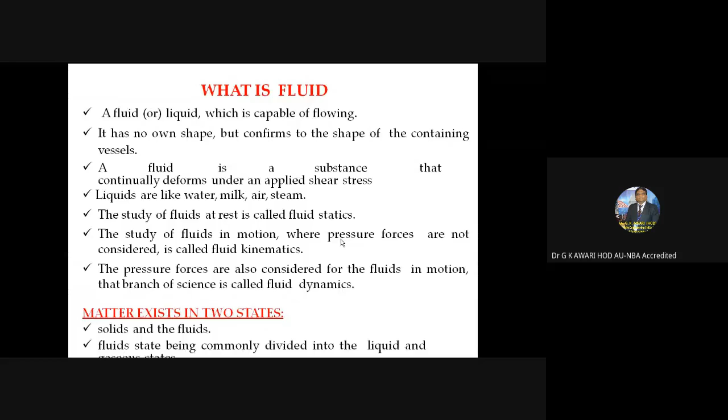What is fluid - you have studied this. Differentiate between solids and fluids - this you have also studied. The units and dimensions, that is fundamental units, derived units - these parts also you have studied. System of units, that is SI unit, FPS unit.

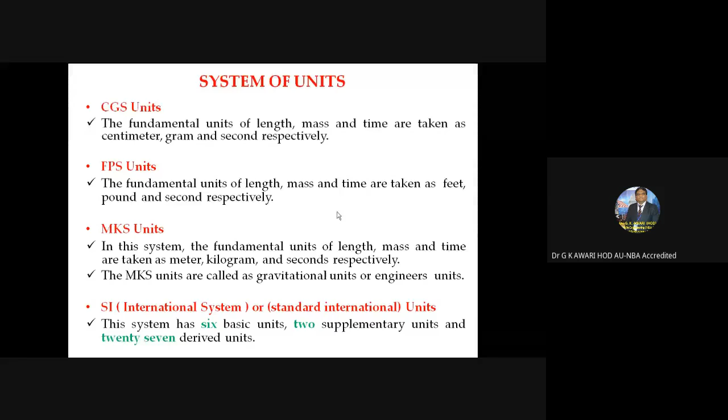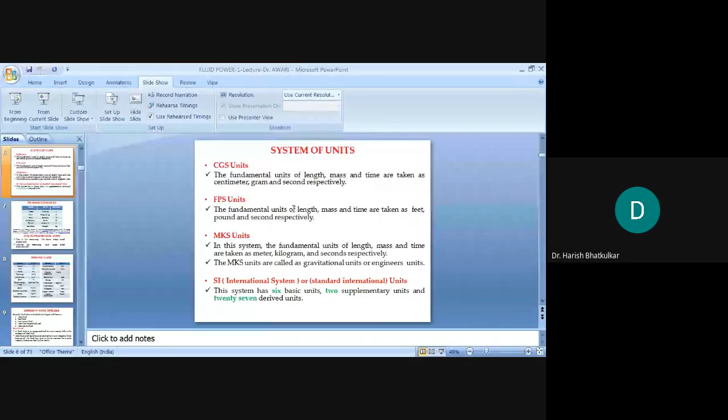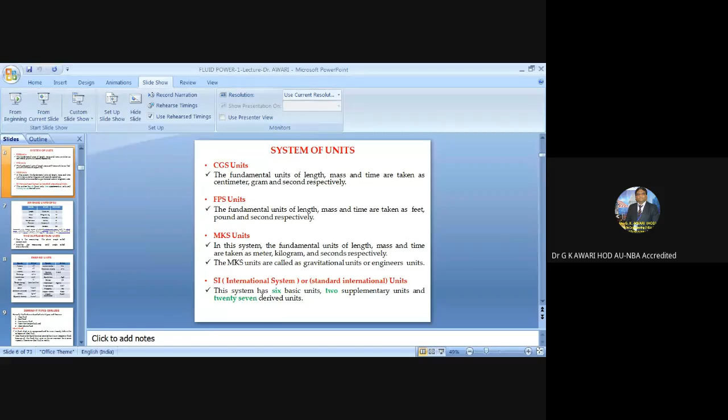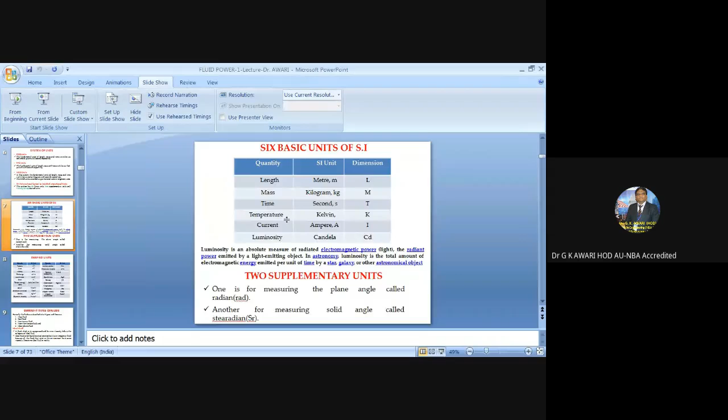Then the different types of fluids - this part is also covered by some other teacher from your organization, that is ideal fluid, real fluid, Newtonian fluid, non-Newtonian fluid, and ideal plastic fluid. So I will not go into the details of that.

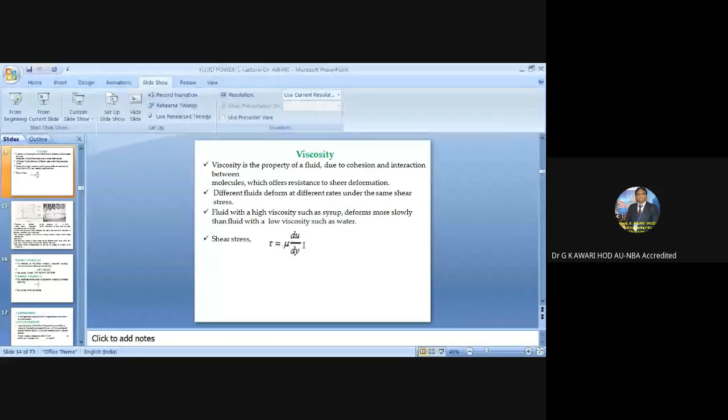Then the properties of fluid also - mass density is being covered, specific weight also it is being covered, volume is being covered, then specific gravity also it is being covered. Viscosity, which is a very important parameter, I hope is also being covered, and the shear stress, that is tau equals mu into du by dy. The explanation of viscosity and the two parts of viscosity, that is dynamic viscosity and kinematic viscosity, it is also being covered.

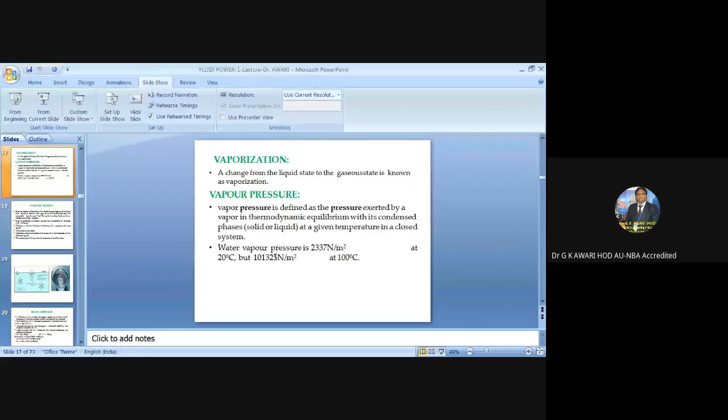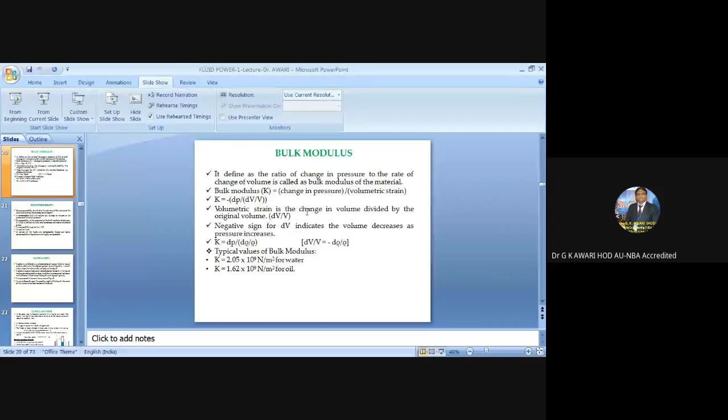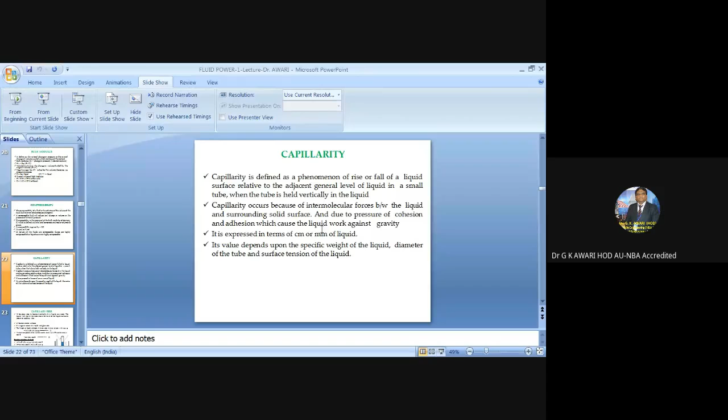Then vaporization - the importance of vapor pressure while designing hydraulic machinery, this part also I hope is being covered. And surface tension, this part is also covered in the basic part of fluid power. Then bulk modulus, reciprocal of compressibility basically. Then compressibility - you know that air is compressible and water is not compressible, so compressibility factor also is being covered. Capillarity, I hope that it is being covered, and capillary rise and capillary depression also you have studied.

So my topic, from where I am starting today, is basically buoyancy and flotation.

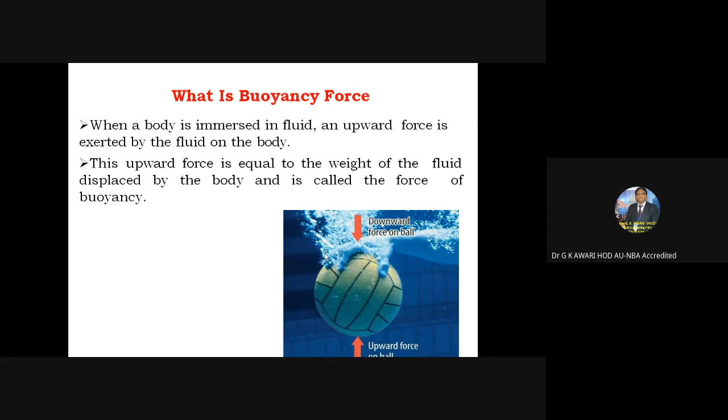If the downward force is more and the upward force is less, the body will sink. This upward force acting on the body is nothing but the buoyant force. When a body is immersed in a fluid, an upward force is exerted by the fluid on the body. This upward force is equal to the weight of the fluid displaced by the body and is called the force of buoyancy.

So basically, the buoyant force is the upward force on an object exerted by the surrounding fluid. So when an object pushes the water...

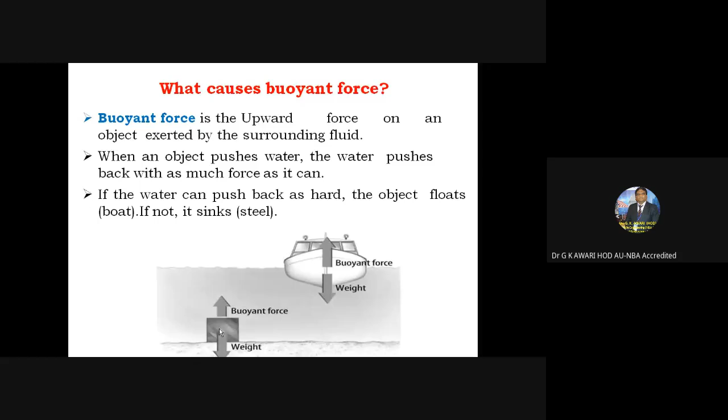So when an object pushes water, the water pushes back with as much force as it can. If the water can push back as hard, the object floats. If not, it sinks. The example given is a boat, and this is the component of steel. Naturally, it will sink. This causes the buoyant force.

Now let us see the forces acting on buoyancy. The buoyant force is caused by the difference between the pressure at the top of the object, which is the gravitational force pushing it downward, and the pressure at the bottom, which is the buoyant force pushing it upward. Since the pressure at the bottom is always greater than at the top, every object submerged in a fluid feels an upward buoyant force.

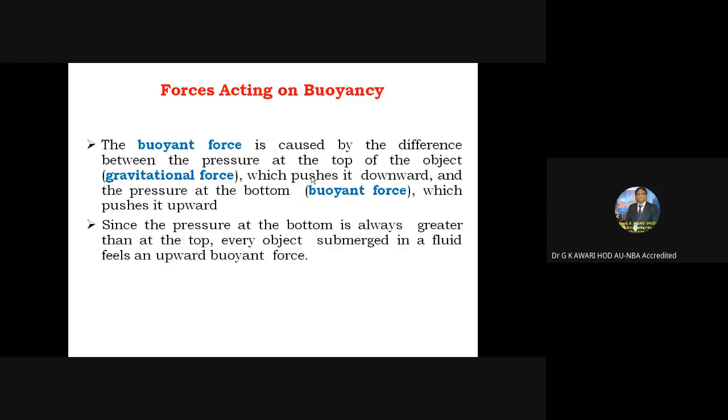So the buoyant force acts in the upward direction, and the weight acts in the downward direction. These are the forces: due to gravitational force which pushes it downward, and the buoyant force which pushes it upward. These are the forces acting on any body kept in water or the sea. Now we will see how to calculate the buoyant force.

So buoyant force is basically the weight of the displaced fluid. BF is equal to W air minus W water. What does W air mean? Buoyant force is nothing but the weight of the object in air minus the weight of the object in water.

For example, a person weighs 250 Newton while swimming in the Dead Sea. When outside of the water, they weigh 600 Newton. What is the buoyant force acting on them? Will they sink or float? Buoyant force is equal to W air minus W water, so it is 600 minus 250, which equals 350 Newton. So the person will float because their weight in the water is less than the buoyant force.

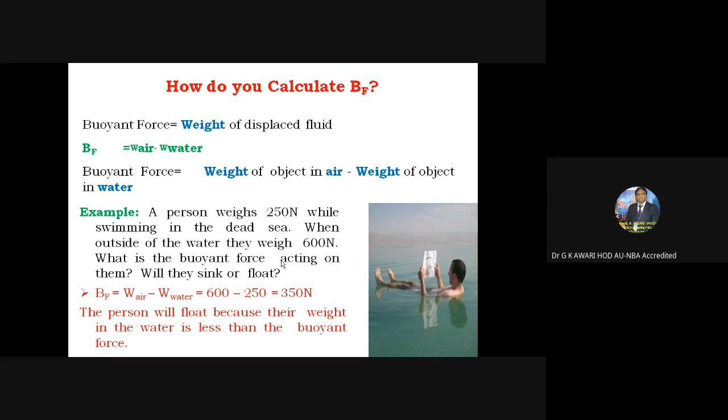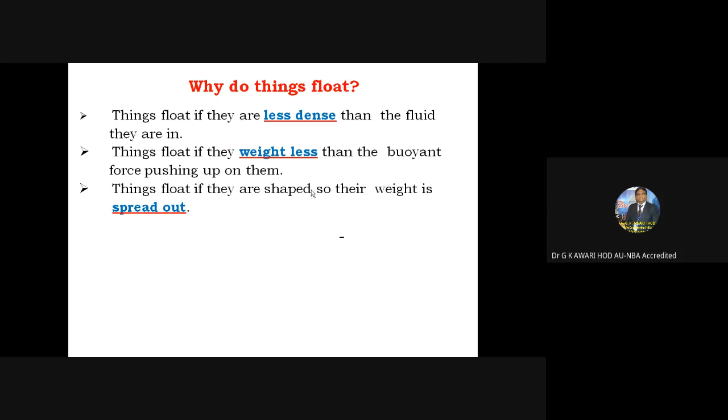Likewise, the buoyant force can be calculated in various applications, such as ship applications, and we can know whether it will float or sink. Then what makes things float? Things float if they are less dense than the fluid they are in. Things float if their weight is less than the buoyant force pushing up on them, and things float if they are shaped so their weight is spread out.

Let us see the example which is being shown here.

So the two examples I have taken here, you can see the boat. Now the boat, even though it is made of iron, is floating in the water. And in the container, maybe we have taken this nail, which is also made of iron, but it is sinking, it is not floating.

So in case of the iron nail, which is compact, the weight of the water displaced by it is much less than its own weight, hence it naturally sinks. And in case of the ship, which is hollow from within, the weight of the water displaced by the ship is more than the weight of the ship, hence the ship floats. So this is the reason that even though both are made up of iron, one object floats and another sinks.

So the example being taken here: the displaced water, and this is the boat of mass 1000 kg, and this is the floating boat.

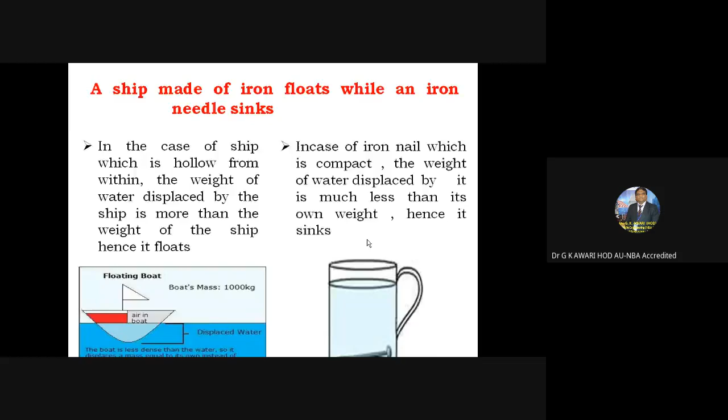So ballast tanks also, for example, three types are there: lowest mass, lowest density - basically it floats. Low mass, low density - it is basically neutral. High mass, high density - naturally it will sink.

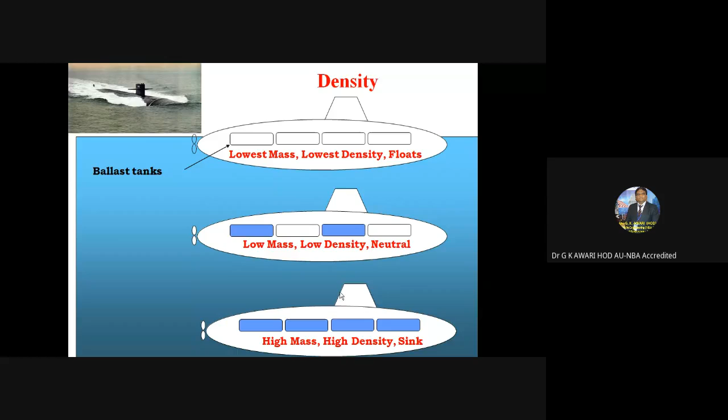So the center of buoyancy, the point through which the force of buoyancy is supposed to act, is known as the center of buoyancy. This center of buoyancy, buoyant force, metacentric height - all these concepts you have studied in the second year of mechanical engineering.

And when you appear for the GATE examination, you will have to see that all your fundamentals, even from the second year, are covered by you, and you will be able to solve the numericals. Only practice of numericals cannot help you. You have to go into the details of each and every fundamental.

So therefore, now we will be studying about the metacentric height, stability of the floating bodies, stability of the submerged body. So the center of gravity, center of buoyancy - here it acts, which is called the point through which the force of buoyancy is supposed to act, is known as the center of buoyancy.

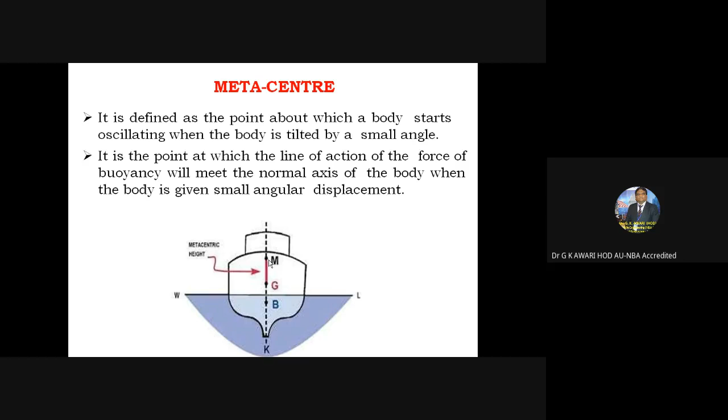So therefore, the metacenter is defined as the point about which a body starts oscillating when the body is tilted by a small angle. So it is the point at which the line of action of the force of buoyancy will meet the normal axis of the body when the body is given a small angular displacement. So in this picture, you can see this is point M, that is metacenter. This is metacentric height, and this is the center of gravity and the center of buoyancy.

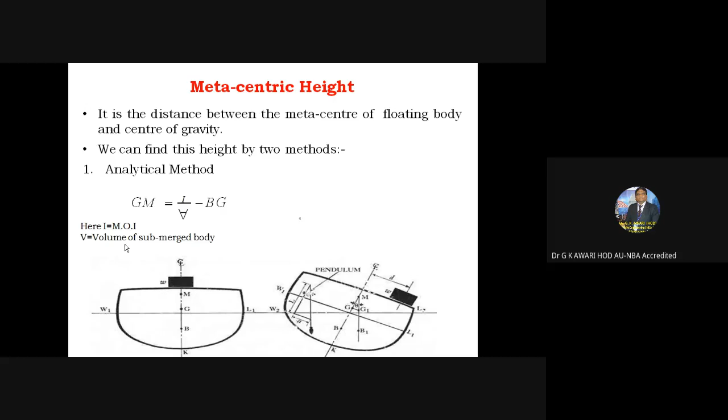Now let us see how the metacentric height is calculated, because it is the distance between the metacenter of the floating body and the center of gravity. So there are basically two methods which you have used also. One is nothing but the analytical method, where we can find out by calculating the moment of inertia and by knowing the volume of the submerged body. Okay, so we can calculate it.

Similarly, even by the experimental method, the metacentric height can be calculated: GM is equal to W1D divided by W tan theta, where W is the weight of the vessel, G is center of gravity, B is center of buoyancy, W1 is movable weight, and D is distance between the movable weight. This type of experimentation you have carried out in your second year fluid power or fluid mechanics and machinery practical, wherein you might have determined the metacentric height, the metacenter, and the buoyancy force.

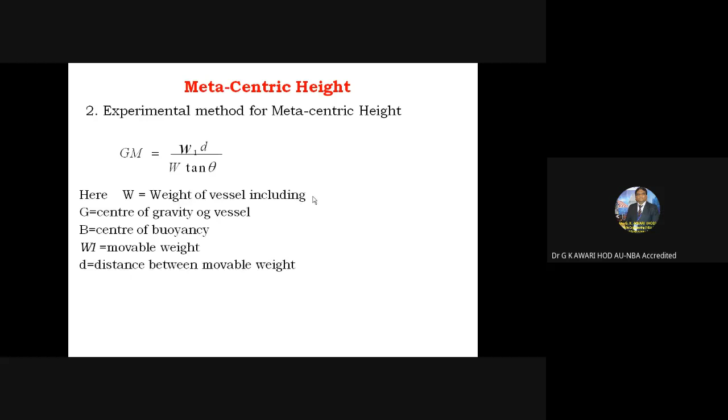So this is the experimental method with which we can calculate. Now let us see the conditions of equilibrium of floating and submerged bodies. The stability of submerged bodies has three conditions: condition A, condition B, and condition C. Here you can see the buoyancy, center of buoyancy, this is G, center of gravity, and B. When a body is in stable equilibrium, the point B is above G, this is the stable equilibrium condition for submerged bodies, since these bodies are submerged and these are the free surfaces.

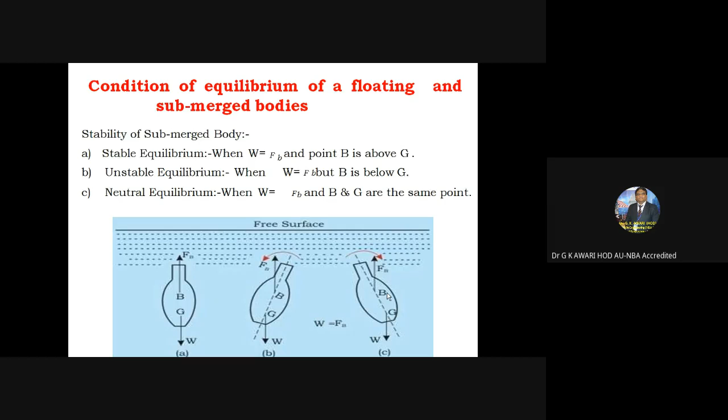Then the neutral equilibrium: when the point B and G are at the same point, this condition is nothing but the neutral condition.

Similarly, for the stability of floating bodies, there are again three conditions: stable equilibrium, unstable equilibrium, and neutral equilibrium. Conceptually, stable equilibrium means if the point M, the metacenter, is above G. There is a restoring moment, and since point M is above the center of gravity, this is stable equilibrium.

What is unstable equilibrium? If the point M is below G, there is an overturning moment of the ship, and point M basically comes below point G. In this case, this condition is the unstable equilibrium.

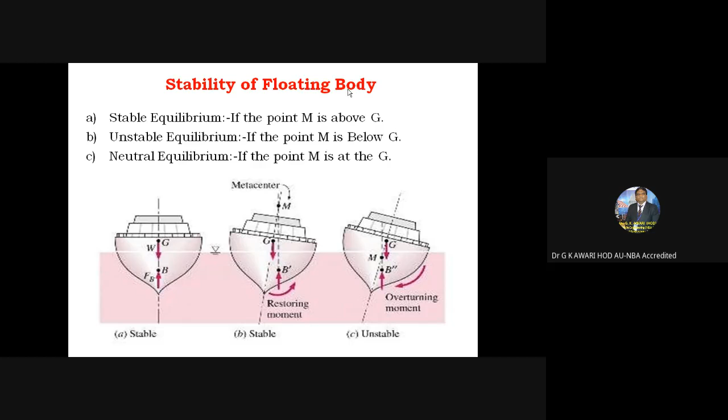Neutral equilibrium means if points M and G coincide at the same point, then it is called neutral equilibrium of a floating body. Try to differentiate between the two: the equilibrium conditions for submerged bodies and for floating bodies. So this is the condition of equilibrium of floating and submerged bodies.

You can see that positive buoyancy, neutral buoyancy, and negative buoyancy are defined here. At the bottom, the sinking position is shown: buoyant force is less than weight, so the object sinks. Neutral buoyancy means buoyant force equals weight, so the object is suspended in the fluid.

And positive buoyancy means buoyant force is greater than the weight of the object, so the object floats. So we have seen three conditions: positive buoyancy, neutral buoyancy, and negative buoyancy.

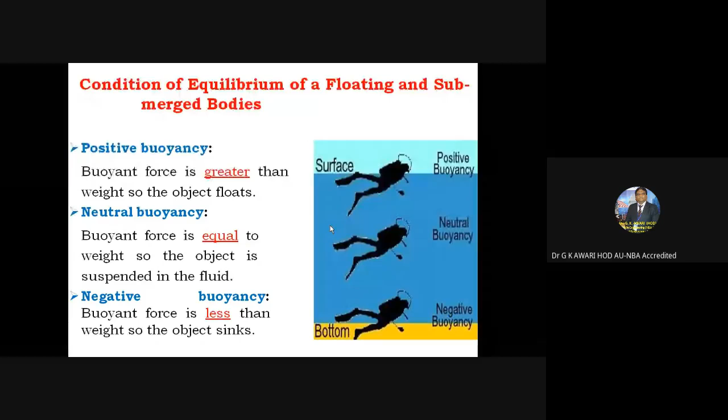This is the first topic as far as my lecture is concerned. Let me take a review from all the students before going into the second topic, control volume analysis of mass, momentum, and energy. What are the topics which we have covered now in my presentation?

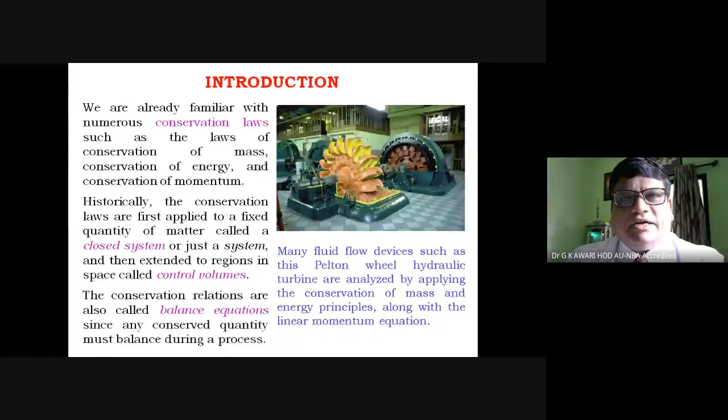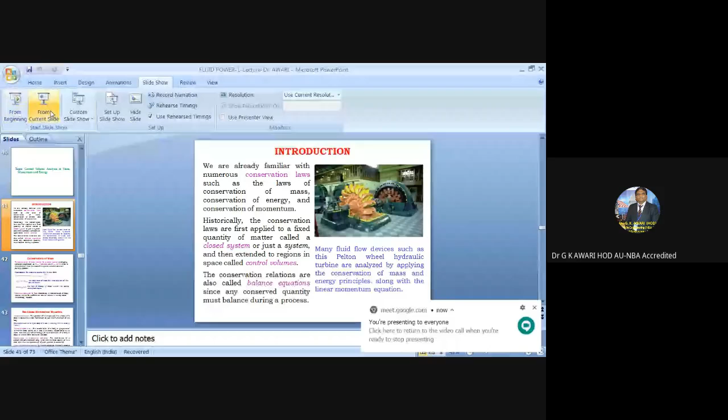The second topic in my presentation is control volume analysis of mass, momentum and energy. The picture on your screen shows a turbine - a Pelton turbine, coupled directly to the generator. In this section we will see mechanical efficiencies, shaft work, and the conservation laws.

We are already familiar with conservation laws such as conservation of mass, conservation of energy, and conservation of momentum. These laws are applied to a fixed quantity of matter, called a closed system, or just the system, and then extended to regions in space, called the control volume.

The conservation relations are also called balance equations, since any conserved quantity must balance during the process. Many fluid flow devices like a Pelton turbine or hydraulic turbine are analyzed by applying the conservation of mass and energy principle along with the linear momentum equation.

The turbine shown, the Pelton turbine, is directly connected to the generator, wherein hydraulic energy of the water is converted into mechanical energy or shaft power due to rotation of the turbine, and further the mechanical energy is converted into electrical energy. So one form of energy is converted into another, and in such cases we need to apply conservation laws, momentum equations, and balance equations.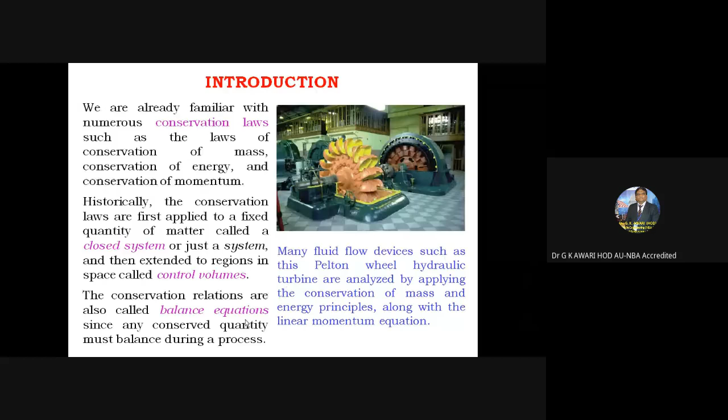What is the conservation of mass? The conservation of mass relation for a closed system undergoing a change is expressed as M_sys equals constant - the statement that the mass of the system remains constant during a process. Mass balance for a control volume CV in rate form is: M_in minus M_out equals dm_CV divided by dt.

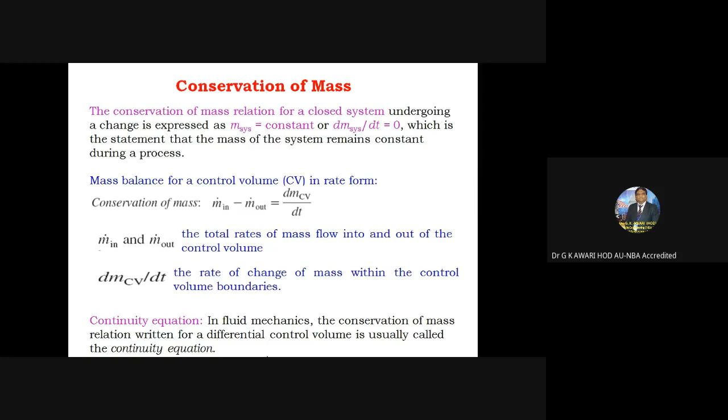What are M_in and M_out? The total rate of mass flow into and out of the control volume, and dm_CV by dt is the rate of change of mass within the control volume boundaries. This is the conservation of mass balance equation for a control volume. In fluid mechanics, the conservation of mass relation written for a differential control volume is usually called the continuity equation.

Then the linear momentum equation - the linear momentum, that is the product of the mass and velocity of a body, is called the linear momentum, or just the momentum of the body.

The momentum of a rigid body is considered as the mass m moving with velocity v, giving mv.

What does Newton's second law state? That the acceleration of a body is proportional to the net force acting on it and inversely proportional to its mass, and that the rate of change of momentum of a body is equal to the net force acting on the body. This relates to the conservation of momentum principle, which you have studied as the linear momentum equation. In fluid mechanics, Newton's second law is usually referred to as the linear momentum equation.

Then the conservation of energy principle: the net energy transfer to or from a system during a process is equal to the change in the energy content of the system. So conservation of energy is E in minus E out equals dE_CV/dt. E in and E out are the total rates of energy transfer into and out of the control volume, and dE_CV/dt is the rate of change of energy within the control boundary. In fluid mechanics, we usually limit our consideration to the mechanical forms of energy only.

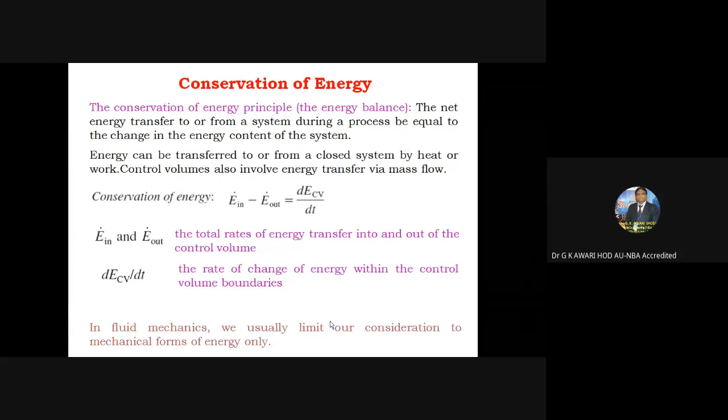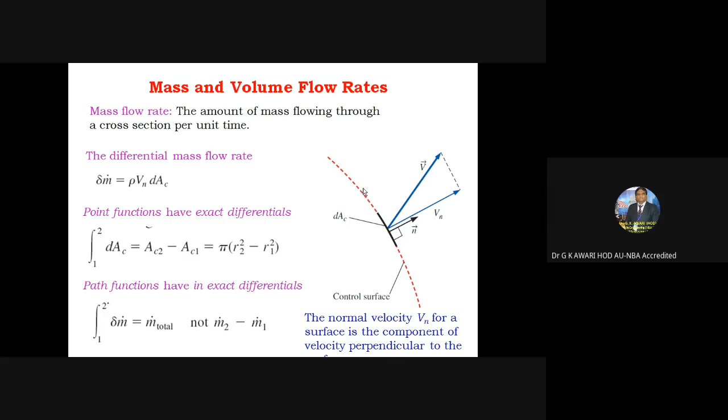Let us see the mass and volume flow rate. We have already studied how to calculate the volume flow rate, also called the discharge, Q equals rho times A times V. When density remains constant, rho gets cancelled, and Q equals A times V, that is area into velocity, with units of meter cube per second. The mass flow rate is in kg per second, which we use in the case of gases. This is the derivation of mass flow rate and volume flow rate.

What we need to see here is the viscosity property, which you have already studied, not covered today. Consider the velocity of the liquid in the pipe - this is the velocity profile. At the bottom point the velocity is zero, and at the outer surface also the velocity is zero, while in the middle the velocity is maximum. So this is the maximum velocity, and this kind of velocity profile will be there. The average velocity, V average, is defined as the average speed through the cross section. This happens because of the viscosity property of the fluid, which you have already studied.

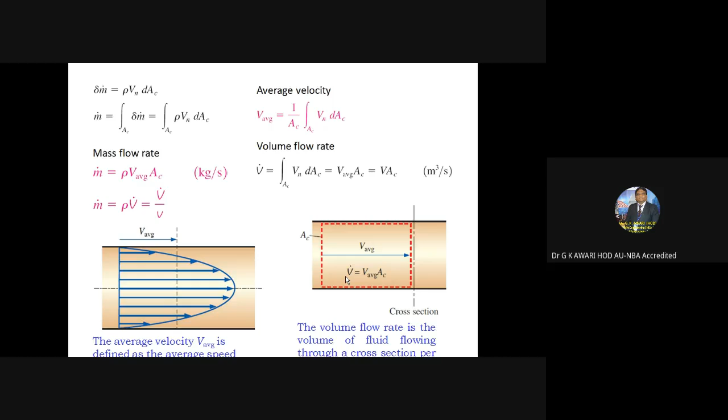The volume flow rate is the volume of fluid flowing through a cross section per unit of time. Then the conservation of mass principle: the net mass transfer to or from a control volume during a time interval delta t is equal to the net change in the total mass within the control volume. So mass in minus mass out equals delta m_CV, in kg, or in rate form, mass in minus mass out equals dm_CV/dt, in kg per second. Mass balance is applicable to any control volume undergoing a process.

Conservation of mass principle for an ordinary bathtub: here m in is 50 kg, and m out is 30 kg. So the quantity of water in the bathtub is delta m_bathtub equals m in minus m out equals 20 kg. Likewise we can calculate the mass of water inside the bathtub.

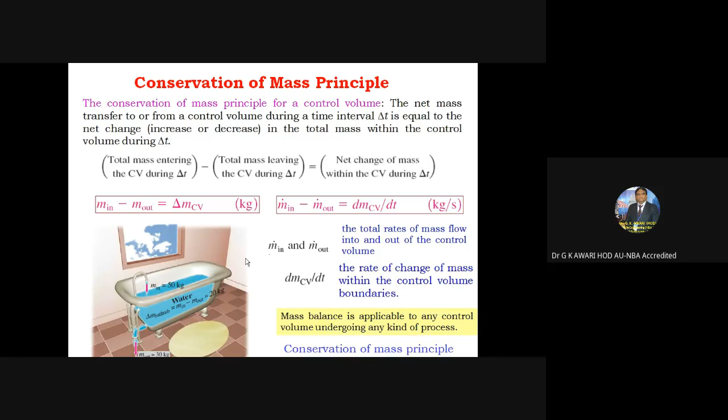So, mechanical energy and efficiency. Mechanical energy is the form of energy that can be converted to mechanical work completely and directly by an ideal mechanical device, such as the ideal turbine.

We have discussed that hydraulic turbines are basically used in hydel power stations to convert hydraulic energy into mechanical energy. Further, it is connected to the generator, which converts the mechanical energy or shaft power into electrical energy.

So the mechanical energy of a flowing fluid per unit mass is P by rho plus V square by 2 plus Gz. P by rho is the flow energy, V square by 2 is the kinetic energy, and Gz is the potential energy or energy difference due to the datum. This is also given by the Bernoulli's equation, or Bernoulli's theorem, which we will also see in today's lecture.

And the mechanical energy balance: delta E mechanical equals P2 minus P1 divided by rho, plus V2 square minus V1 square divided by 2, plus G into Z2 minus Z1, in kilojoules per kg. So the mechanical energy of a fluid does not change during flow if its pressure, density, velocity, and elevation remain constant.

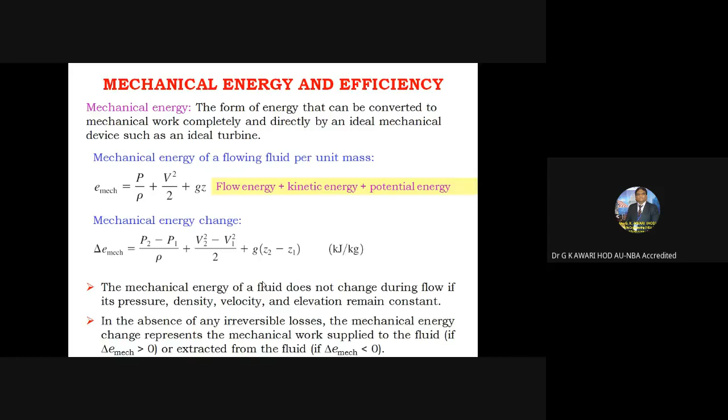Let us see the shaft work. The transfer of mechanical energy is usually accomplished by a rotating shaft. Thus, mechanical work is often referred to as shaft work.

A pump or a fan receives shaft work, because a hydraulic pump or a fan is a work-absorbing device, not a work-developing device. A fan requires an electric motor to run it, and pumps require an electric motor or engine to run them. So these are all power-absorbing devices.

However, the turbine converts the mechanical energy of the fluid into shaft work. So the turbine is a power-producing device. We can see that mechanical efficiency equals mechanical energy output divided by mechanical energy input.

The effectiveness of the conversion process between the mechanical work supplied or extracted and the mechanical energy of the fluid is expressed by the pump efficiency or turbine efficiency.

Efficiency of the pump is the mechanical power increase of the fluid divided by mechanical power input. Efficiency of the turbine is the mechanical power output, because we are getting shaft work out of it.

Once the jet of water strikes the buckets of the Pelton turbine, the runner of the turbine starts rotating, and since the runner is mounted onto the shaft, the shaft also starts rotating. So it's basically a mechanical power output, and the mechanical power decrease of the fluid is the input.

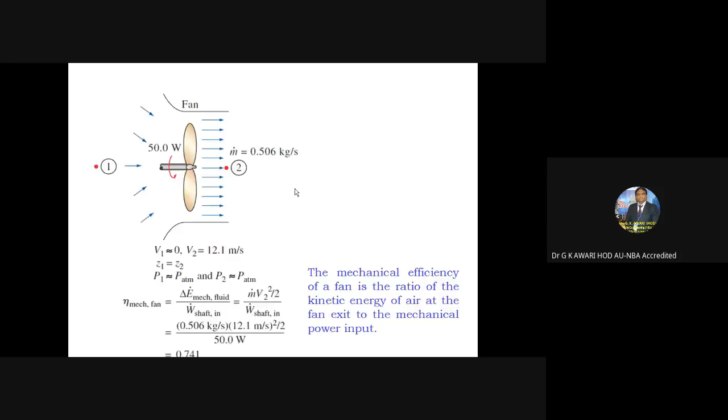So mechanical efficiency of the fan can be calculated as m times V2 square by 2, divided by W shaft in, and it comes out to be 0.741, or 74.1%. Likewise it can be calculated. Now we will see a second example.

Motor efficiency is nothing but the mechanical power output divided by electrical power input, which is the motor efficiency. Generator efficiency is nothing but electrical power output divided by mechanical power input, that is the generator efficiency.

The pump motor overall efficiency is the efficiency of the pump multiplied by the efficiency of the motor, the product of these defines the pump motor overall efficiency. Similarly, turbine generator overall efficiency is defined as the efficiency of turbine multiplied by the efficiency of the generator. A small example is taken here.

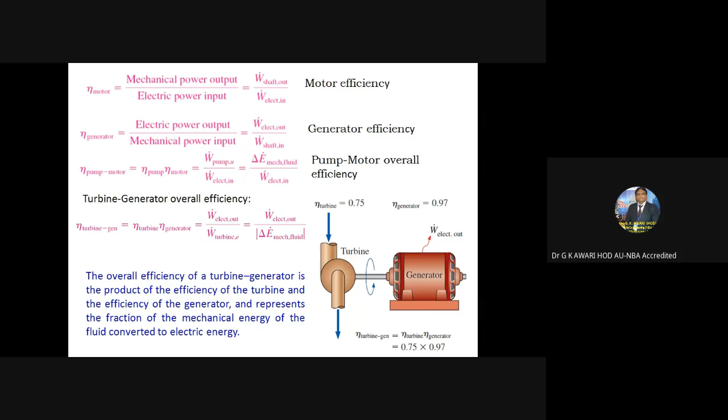A turbine is there, with efficiency 0.75. This turbine is directly coupled to a generator whose efficiency is 0.97. Calculate the turbine generator overall efficiency. Naturally, it is the product of these two efficiencies, which comes out to be 73%.

So this is the second topic which I have covered today. Before going to the next topic, let us take a review of what we have studied, so that we can proceed further and then start with the next topic. Can any student who is attending the class tell me which topic we have covered in the second part of the presentation?

Can anybody tell me what we have studied? Hello? Can any student unmute and tell me, is Pratik there? Pratik? Yes, Pratik is online. Pratik Gulande, can you tell me, are you listening, which topic we have covered now in the second part of the presentation?

In the third part of my presentation, I will take up a few previous GATE examination questions, so that you will know what kind of questions are asked in the examination and how to answer them. Let me be clear, you cannot score in the GATE examination by guessing. If you feel that since MCQs are there you can guess and pass, it is not possible. You need to concentrate on each and every subject thoroughly, with great concentration.

You should study it, and at the same time practice some numericals also. The first question: static fluid can have non-zero normal stress and shear stress. The answer is positive normal stress and zero shear stress. This is from the GATE 2001 examination. This topic of static fluid I have not covered today, but some of your teachers have covered this topic in your college, as Amit has briefed me. So therefore these questions are there.

For a non-Newtonian fluid, the shear stress is not proportional to the shear strain. You know that a Newtonian fluid is the fluid which obeys Newton's law of viscosity, for example water and kerosene are examples of Newtonian fluid. Similarly, the fluid which does not obey Newton's law of viscosity is called non-Newtonian fluid. Non-Newtonian fluids are things like paint, and toothpaste is also an example.

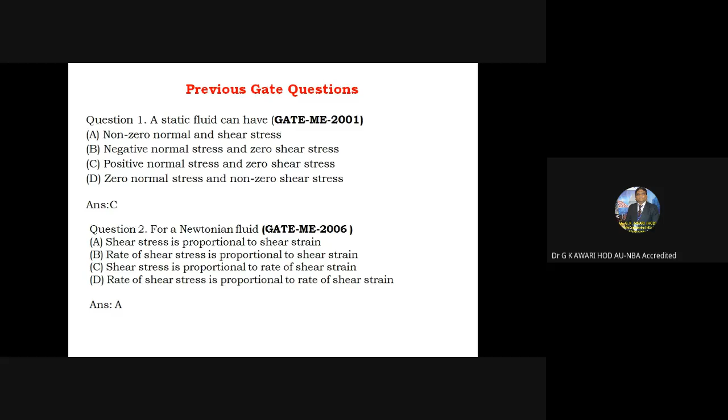These are the non-Newtonian fluids. In Newtonian fluid, Newton's law of viscosity states that shear stress is proportional to shear strain. This was a GATE 2006 examination question.

Let us go to the third question. In GATE 2001, the SI unit of kinematic viscosity is meter square per second. So this is the correct answer. We have seen kinematic viscosity and dynamic viscosity and their units while brushing up our knowledge. So this was the question on kinematic viscosity.

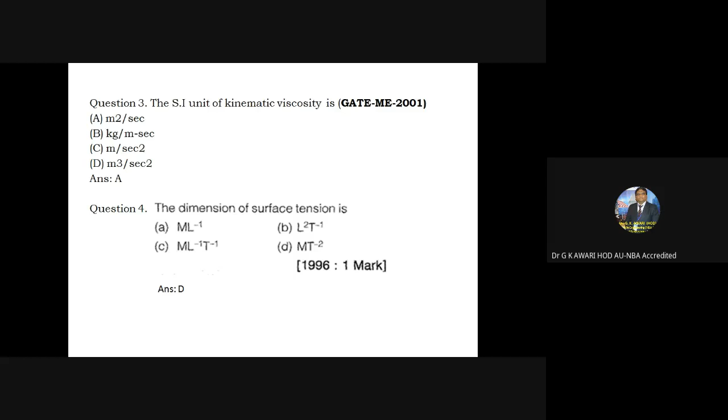Similarly, dimensions of surface tension. This is question number 4 on dimensions of surface tension.

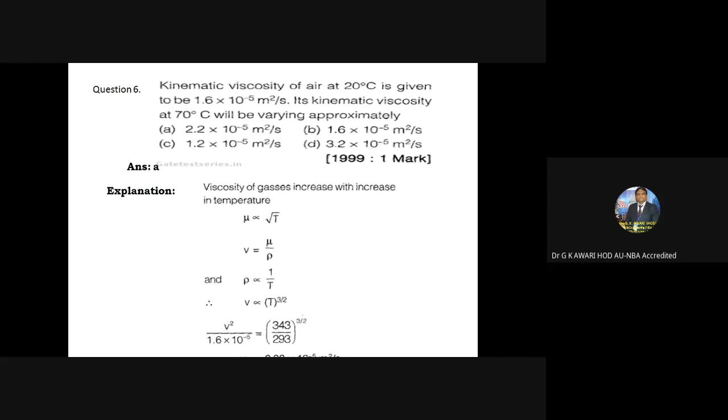This is what you have been asked to calculate: kinematic viscosity of air at 20 degrees centigrade is given as 1.6 into 10 to the power of minus 5 meter square per second. What will be the kinematic viscosity at 70 degrees centigrade, approximately? So you need to calculate it. By applying the formula, it comes out to be V2 equals 2.02 into 10 to the power of minus 5 meter square per second. So don't think that just because it's for 1 mark you should stick with any option. Try to apply the correct formula, calculate it, and accordingly choose your option.

Similarly, this is a GATE 2016 question which we covered in the first part of the presentation: for a floating body, the buoyant force acts at which point? Options were centroid of the floating body, center of gravity of the floating body, centroid of the fluid vertically below the body, or centroid of the displaced fluid. Option D is correct, that is centroid of the displaced fluid.

For a completely submerged body with center of gravity G and center of buoyancy B, what is the condition of stability? This was a GATE 2014 question. We have already studied that point G is located below B for a submerged body, which is the condition for stability. So we have studied stable, neutral, and unstable conditions.

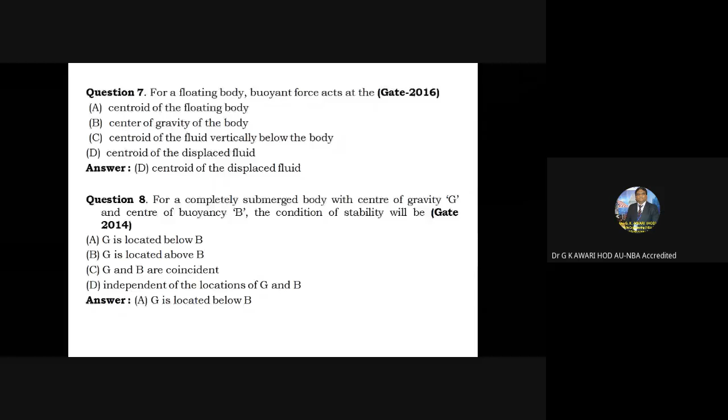Question number 9: for the stability of a floating body under the influence of gravity alone, which statement is true? This question was asked in GATE 2010: metacenter should be below the center of gravity, or metacenter should be above the center of gravity. Answer B is correct: metacenter should be above the center of gravity. So under the influence of gravity alone, you need to choose the correct answer from the stability conditions we have studied.

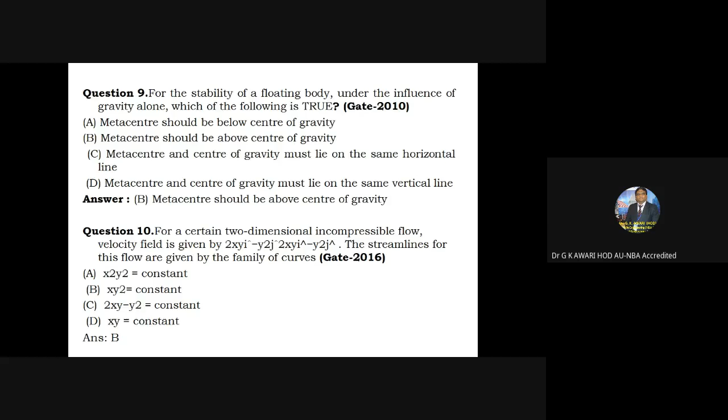So today we have studied buoyancy and flotation, the conservation of mass, conservation principle, and the continuity equation.

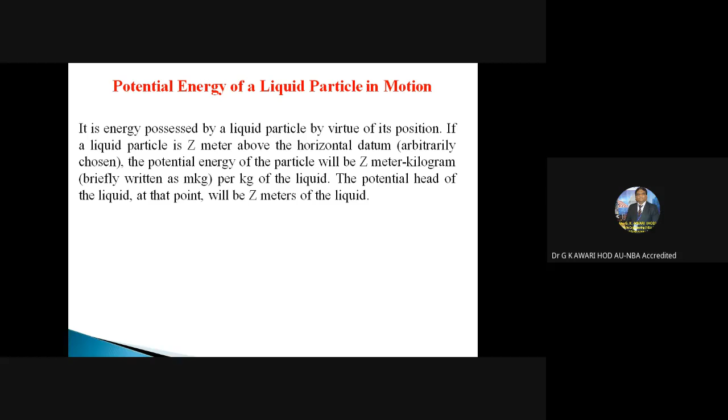So we have seen the example of potential energy. Now the kinetic energy of a liquid particle in motion is the energy possessed by a liquid particle by virtue of its motion or velocity. If a liquid particle is flowing with a mean velocity of v per second, then the kinetic energy of the particle will be v square by 2g m-kg, that is per kg of liquid, and the velocity head at that velocity will be v square by 2g. So kinetic energy is nothing but v square by 2g, and when the liquid particle is in motion, the kinetic energy will be there.

For example, you have seen the fire brigade. At the end of the hose there is a nozzle which is placed. What is the function of the nozzle? It converts the pressure energy into kinetic energy. The velocity or kinetic energy at the inlet of the nozzle is lesser than at the outlet. What happens at the outlet? Due to the reduction in the area of the nozzle, the pressure energy gets converted into kinetic energy, and the jet of water is formed. Similarly, the kinetic energy can be calculated.

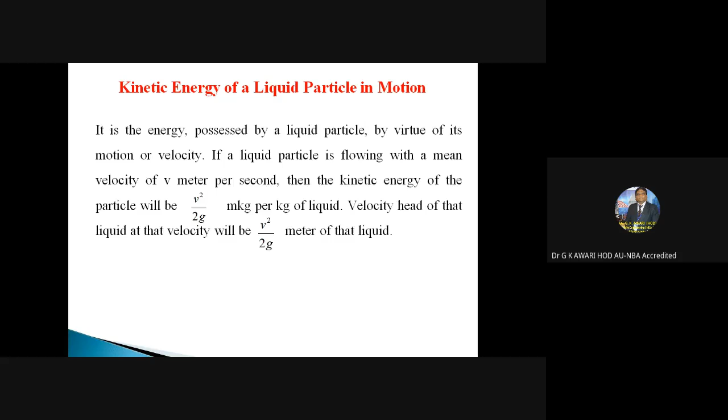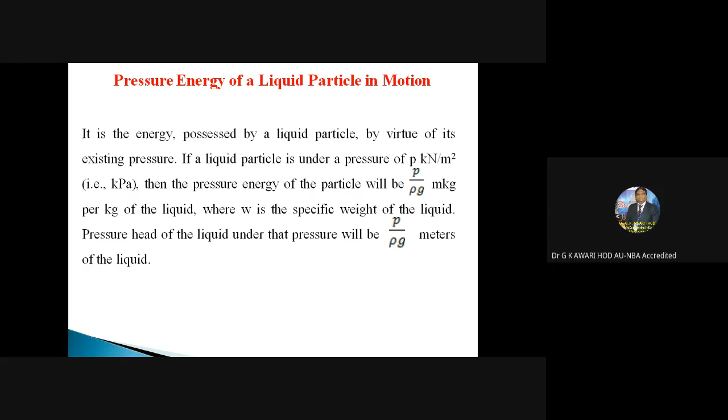Similarly, the pressure energy of a fluid particle in motion is the energy possessed by a liquid particle by virtue of its existing pressure. If a liquid particle is under pressure of P kilonewton per meter square, that is kPa, then the pressure energy of the particle will be P by rho-g, m-kg per kg of the liquid. When W is the specific weight of the liquid, the pressure head on the liquid under that pressure will be P by rho-g of the liquid.

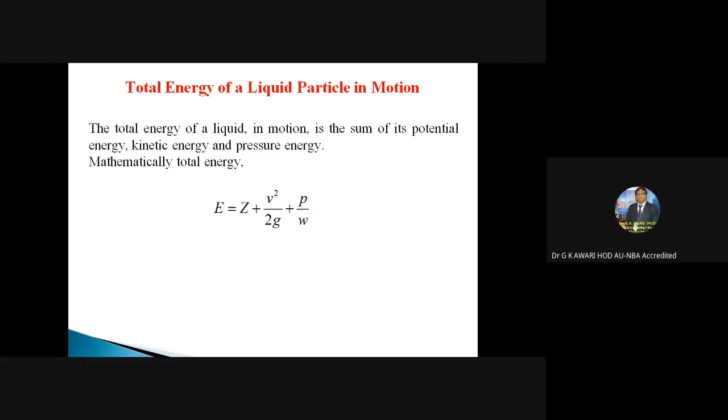So what is the total energy of a liquid? Here the Bernoulli's equation or Bernoulli's theorem comes into the picture. The total energy of a liquid in motion is the sum of its potential energy, kinetic energy, and pressure energy. Mathematically it can be written as E equals Z plus V square by 2G plus P by W. So this is the total energy. P by W is the pressure energy component, V square by 2G is the kinetic energy component, Z is the potential energy component, and the summation of all three is the total energy. So the total head of a liquid particle in motion is the sum of its potential head, kinetic head, and pressure head. Mathematically it is written as H equals Z plus V square by 2G plus P by W, that is the total head.

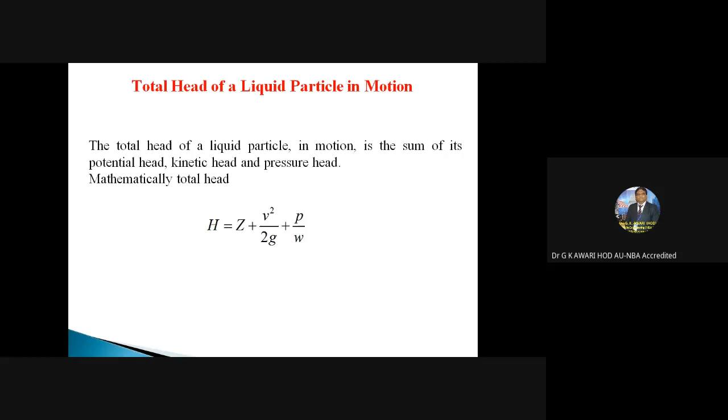Then we will see the Bernoulli's equation. This equation was developed by Daniel Bernoulli in 1738, and what he proposed is that for a perfect incompressible fluid or liquid flowing in a continuous stream, the total energy of a particle remains the same while the particle moves from one point to another. This statement is based on the assumption that there are no losses due to friction in the pipe.

Which means that you can see there is a variation in the geometry. In this picture you can see there is a variation in the geometry, and this point is Z1, which is taken at the center of the cross section. This point is Z2.

This point is Z2. This is the velocity at cross section 1, and this is the velocity at cross section 2. So the total energy, that is Z plus V square by 2G plus P by W, is equal to constant.

So Z is nothing but potential energy, V square by 2G is kinetic energy, and P by W is nothing but the pressure energy. Under this assumption, Bernoulli's theorem or Bernoulli's equation, proposed long back in 1738, suggests that the total energy of the fluid remains constant.

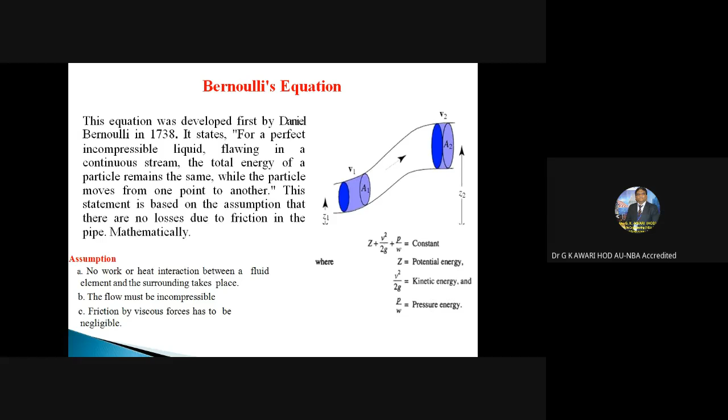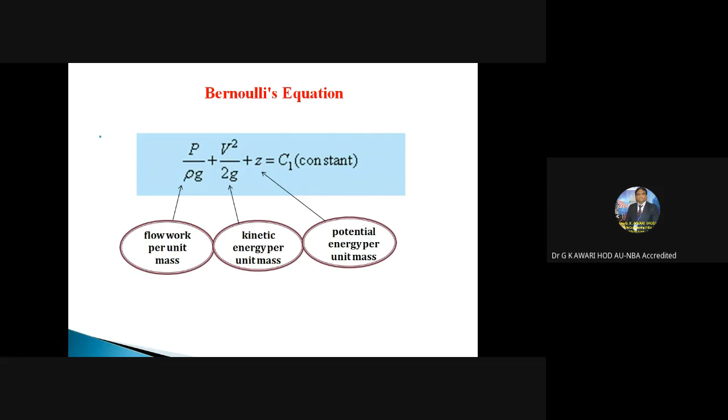So the Bernoulli's equation components are flow work per unit mass, kinetic energy, and potential energy, and it is going to be a constant. So we can say that P1 by rho g plus V1 square by 2g plus Z1 is equal to P2 by rho g plus V2 square by 2g plus Z2. This is what the Bernoulli's theorem says.

Now in the same example, by taking the two cross sections, cross section 1 and cross section 2, you can see that P1 by rho g plus V1 square by 2g plus Z1 is equal to P2 by rho g plus V2 square by 2g plus Z2 plus HF. HF is nothing but loss of head due to friction.

So we have assumed the direction of flow also from left side to the right side. If it is from left side to the right side, naturally it is being added on the right side, that is P2 by rho g plus V2 square by 2g plus Z2 plus HF.

अगर ये उल्टा होता, मतलब this liquid would have flown from higher side to the lower side, तो उसी equation में, उसी condition में, this HF, loss of head due to friction, it would have been added here on the left hand side of the equation, that is P1 by rho g plus V1 square by 2g plus Z1 plus HF.

So this basic concept is also useful for finding out whether a device is a turbine or a pump.

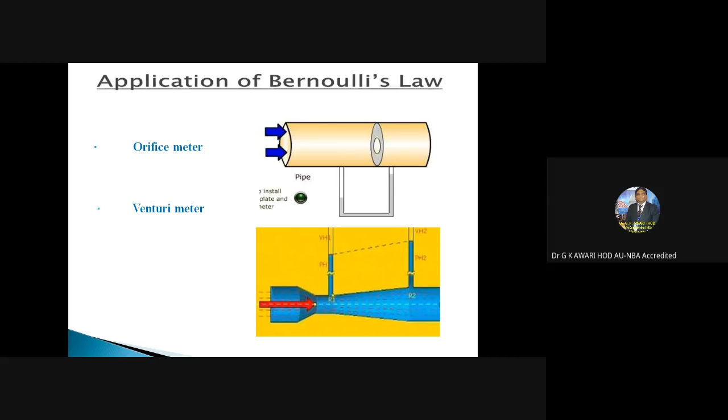Similarly, the venturimeter is there. In the venturimeter, you can see the converging section, the throat section, and the diverging section. So there are three parts of the venturimeter: the diverging section, the throat section, and the converging section.

Venturimeter is a device used for measurement of flow in a pipeline, based on the principle of Bernoulli's theorem. It consists of three parts: converging cone, short cylindrical throat, and a diverging cone. The length of the diverging cone is more than the length of the converging cone. There is a certain reason for this.

In the converging cone, the fluid is being accelerated. Due to the converging nozzle shape, the area of the pipe is reducing, so the pressure energy gets converted into velocity energy. In the diverging section, retardation is taking place where there can be loss of pressure energy or eddy formation. Therefore, a longer length is kept so that energy loss of the fluid is minimized, since the fluid is being retarded in this section of the venturimeter.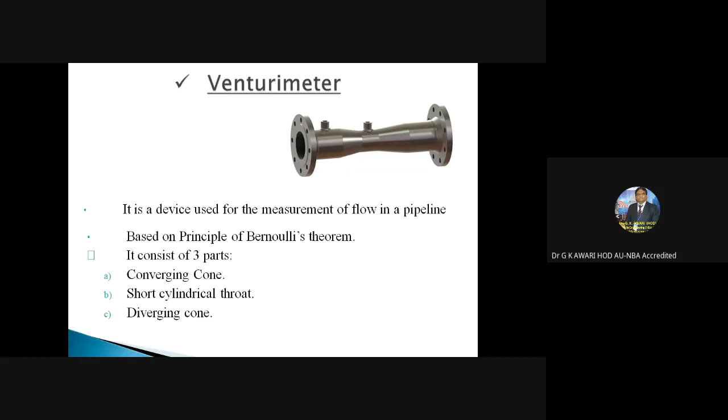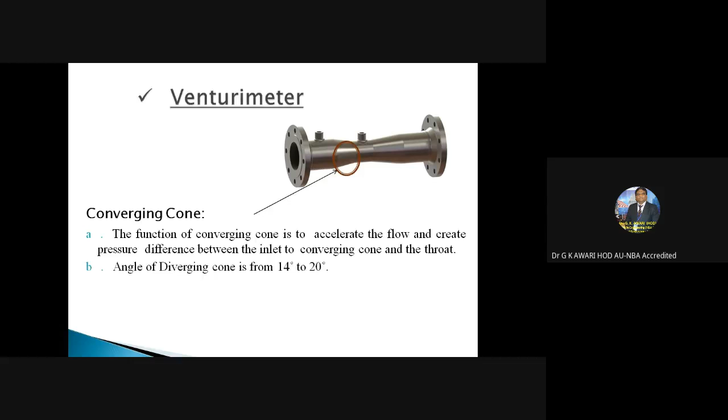The function of the converging cone is to accelerate the flow and create a pressure difference between the inlet to the converging cone and the throat. Angle of the converging cone is normally 14 to 20 degrees. The venturimeter also has a small cylindrical throat.

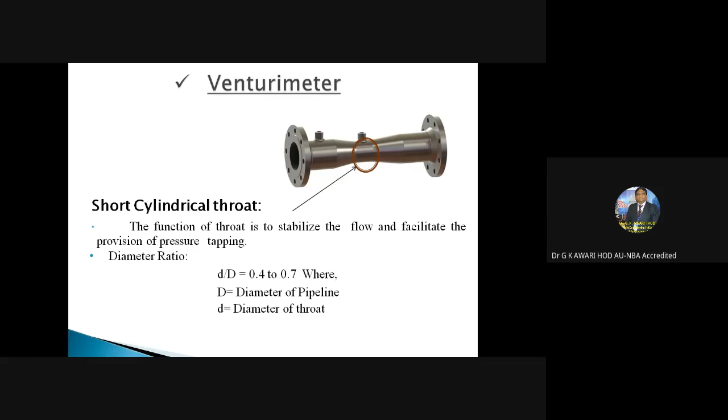The function of the throat is to stabilize the flow and facilitate the provision of pressure tapping. The diameter ratio d by D is normally 0.4 to 0.7, where capital D is the diameter of the pipeline and small d is the diameter of the throat.

This is the diverging cone of a venturimeter. Its function is to reduce the velocity and increase the pressure back to its original value, to the extent possible. The angle of the diverging cone is 5 to 7 degrees, compared to the converging cone's larger angle, since the length is more here and less there. In the converging cone, fluid acceleration takes place; in the diverging cone, fluid retardation takes place. This angle is kept as low as possible, 5 to 7 degrees, so there is minimum energy loss in the diverging cone of a venturimeter.

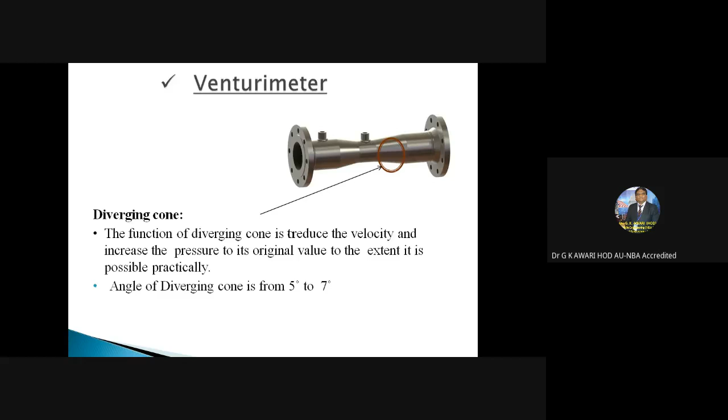This is another example of the venturimeter, an inclined venturimeter, kept in an inclined position. You can see the pressure difference being created. This figure shows the venturimeter inserted in an inclined pipe, connected in a vertical plane to measure the flow rate through the pipe.

Let us consider the steady, ideal, one-dimensional flow of fluid through a venturimeter. Let the velocity and pressure at the inlet section be at point 1, with V1 and P1, and those at section 2 be V2 and P2. Then we apply Bernoulli's equation.

Bernoulli's equation states P1 by rho g plus V1 square by 2g plus Z1 is equal to P2 by rho g plus V2 square by 2g plus Z2. So we take the velocity terms on one side and the pressure terms on the other side.

If rho is the density of the fluid flowing through the venturimeter, from the continuity equation, rho1 A1 V1 is equal to rho2 A2 V2. Since rho1 and rho2 are constant and equal, they get cancelled, and finally we get V2 A2 is equal to V1 A1 from the continuity equation.

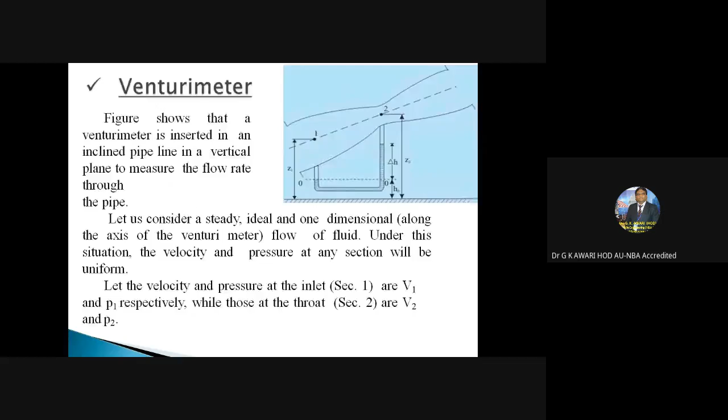Putting this into the equation, we can find the velocity V2 at the throat section of the venturimeter, which is equal to 1 by square root of 1 minus A2 square divided by A1 square, multiplied by 2gH1 minus H2.

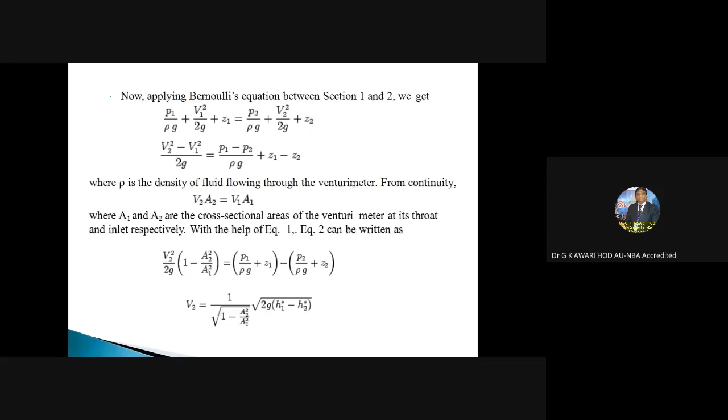H1 minus H2 are the manometric readings which we have recorded. So finally, applying Bernoulli's equation, we can find the volume flow rate through the pipe, given by Q equals A2 V2, which gives us this equation for the discharge of flow through the venturimeter.

Actual discharge can be calculated by multiplying the theoretical discharge with the coefficient of discharge. The value of the coefficient of discharge for a venturimeter varies from 0.91 to 0.99, depending on the condition of flow and losses.

In the case of the orifice meter, the coefficient of discharge is less, while in the case of the venturimeter, the CD, that is coefficient of discharge, is more, so accuracy will be higher compared with the orifice plate.

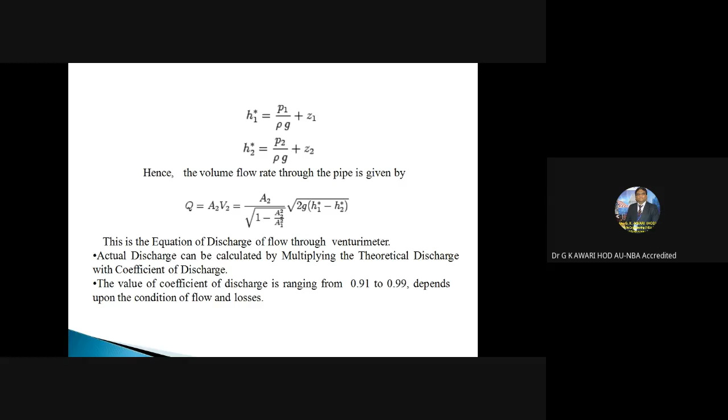Merits and demerits of the venturimeter: recovery of pressure is near the original value and loss of energy is minimum, but the demerits are that its cost is high and it occupies more space than an orifice meter. Its applications include calculating flow rate of fluid in a tube and setting the flow of gasoline in the ignition system of a motor vehicle.

In the field of medicine, a venturimeter can be designed to measure the rate of blood flow in the arteries. So there are several applications of the venturimeter as a flow measuring device.

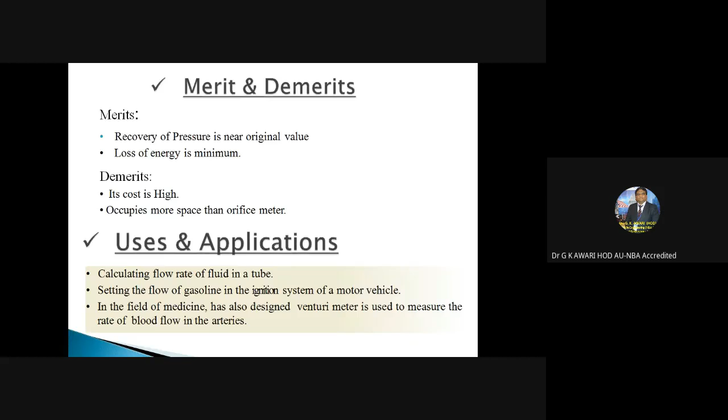Let us come to the next topic of application, the orifice meter. This circular plate is placed inside the water flow, having a small hole. Due to this, what happens?

There is a sudden contraction of the flow of fluid, due to which there is a conversion of pressure energy into velocity energy, and this pressure difference can be recorded by the manometer connected to the two points of the orifice meter. The advantage is that it can be installed in a pipeline with minimum trouble and expense compared with the venturimeter.

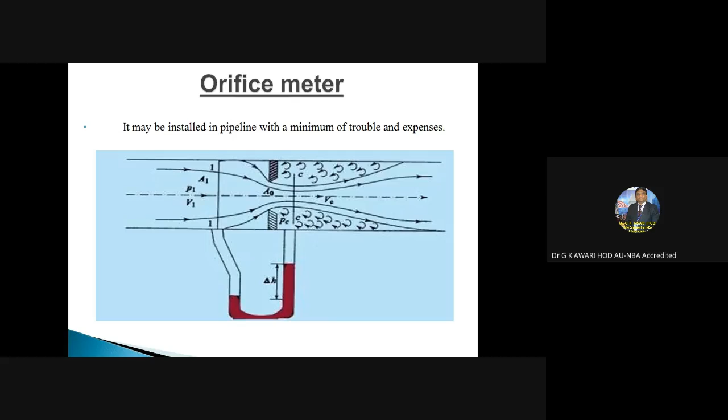The orifice meter is a device to determine the rate of flow of water or liquid through a pipe. It consists of a flat circular plate which has a sharp-edged circular hole called an orifice.

It is fixed concentric to the pipe. The orifice diameter is generally kept half of the diameter of the pipe. It is based on the same principle as explained for the venturimeter. The value of CD varies from 0.6 to 0.65. It is economical and less space is required for fitting.

Now compare the value of coefficient of discharge. For the venturimeter it was 0.9 to 0.995, and here for the orifice meter it is 0.6 to 0.65, which means the orifice meter is less accurate compared with the venturimeter.

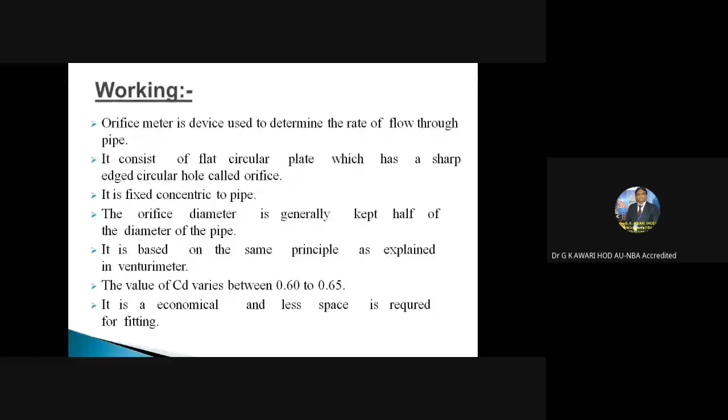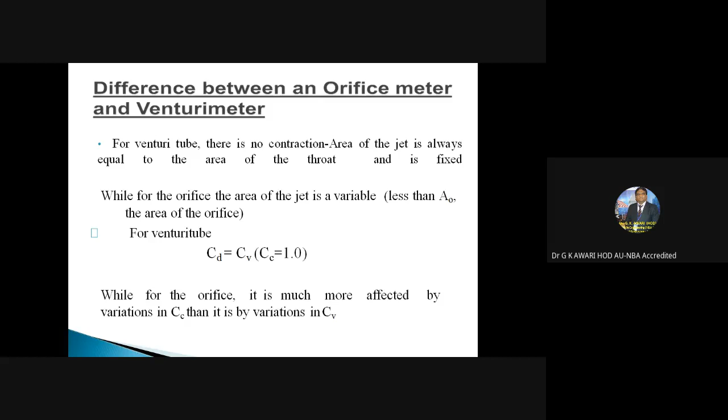The difference between an orifice meter and a venturi meter is that for a venturi tube there is no contraction; the area of the jet is always equal to the area of the throat. While for the orifice, it is much more affected by variations in CC, so CD is equal to CV into CC, where CC is equal to 1.

The third application I would like to cover, and then I will stop with today's presentation; next time we will go with the fourth topic. So the third application is the pitot tube.

This is the pitot tube, which is a simple device used for measuring the velocity of a fluid at the required point in a pipe.

Now try to understand that this is not a flow measuring device. Pitot tube is used for measuring the velocity of the fluid in a pipe. It is like a simple tube which is inserted on the front end of the tube.

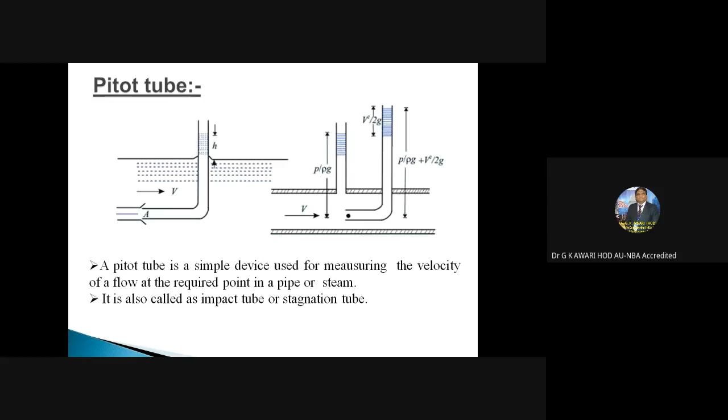A converging section will be there, due to which a stagnation point will be formed, and due to that a pressure difference will be there, which is recorded with the help of the manometer.

So the basic pitot tube consists of a tube pointing directly into the fluid. As the tube contains fluid, a pressure can be measured. The moving fluid is brought to rest as there is no outlet to allow the flow to continue. This pressure is the stagnation pressure of the fluid, also known as the total pressure or the pitot tube.

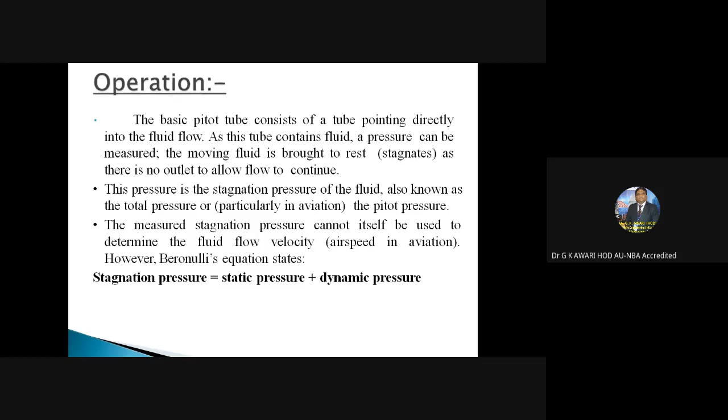The measured stagnation pressure cannot itself be used to determine the fluid flow velocity. Therefore, stagnation pressure is equal to static pressure plus dynamic pressure. So the pitot tube is used for measuring the velocity of the fluid.

Orifice meter and venturi meter are used to measure the flow rate of the liquid, to calculate the discharge, and the derivation and equation. All these things we have covered.

So in today's presentation, we have covered in the third part the Bernoulli's equation and its application to the venturi meter, orifice meter, and the pitot tube. So let me again go to the topic.

So students, those who are listening to me, now we will take a brief review of the topic which we have covered today. Can you tell me which topic we have covered now in the third part of my presentation?

Can anybody answer? Devesh, Chirag? Devesh, can you answer? Okay, Chirag, are you listening to me? Chirag, are you listening to me?